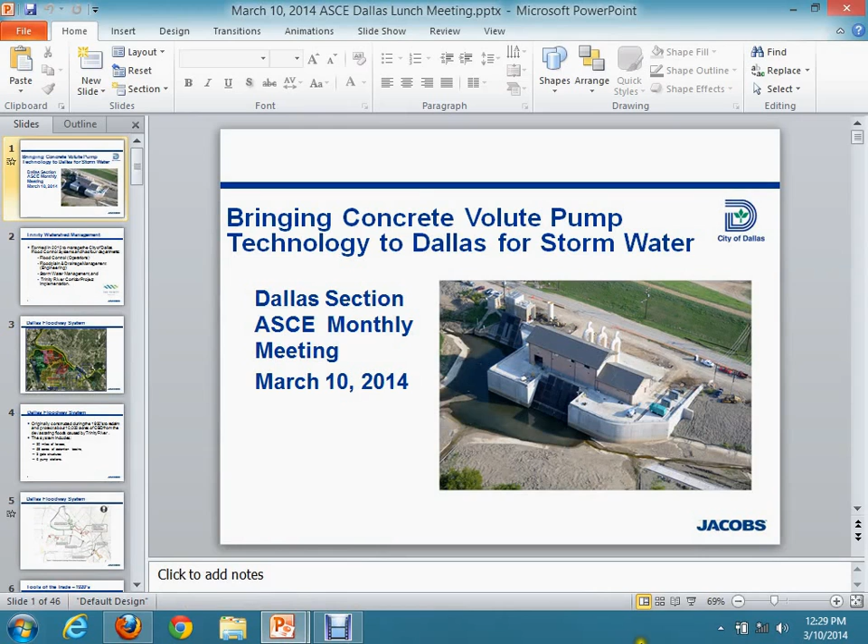One of the interesting things about ASCE is that they have a wide variety of programs. I've listened to people talk about policy and their experiences as an engineer - Philip's going to help me out there. You manage to work in the technical side every now and then. If you remember watching the Olympics a couple weeks ago, judged events had style points and technical points. Well, I'm not saying we won't get any style points today, but we're going to go heavily for the technical points. So I'm working with Leslie to see if you can get double PDH credits for that, if you can hang with me.

We're going to talk about the Dallas Stormwater Pump Station program that we've been working on for the last several years. We've been doing this under the Trinity Watershed Management Group. It's a division of the City of Dallas. They're separate now, separate from Public Works and Water Utilities, and they really have four main missions.

One of those is flood control - they operate the levees and the pump stations we're going to talk about. They also do floodplain and drainage management for the storm sewer pipes and things like that. They have a stormwater component - if you live in the City of Dallas and pay that stormwater fee, these are the guys that manage that. They also manage the big Trinity River Corridor project that this all kind of centers around. So it's a very dedicated group with a wide mission.

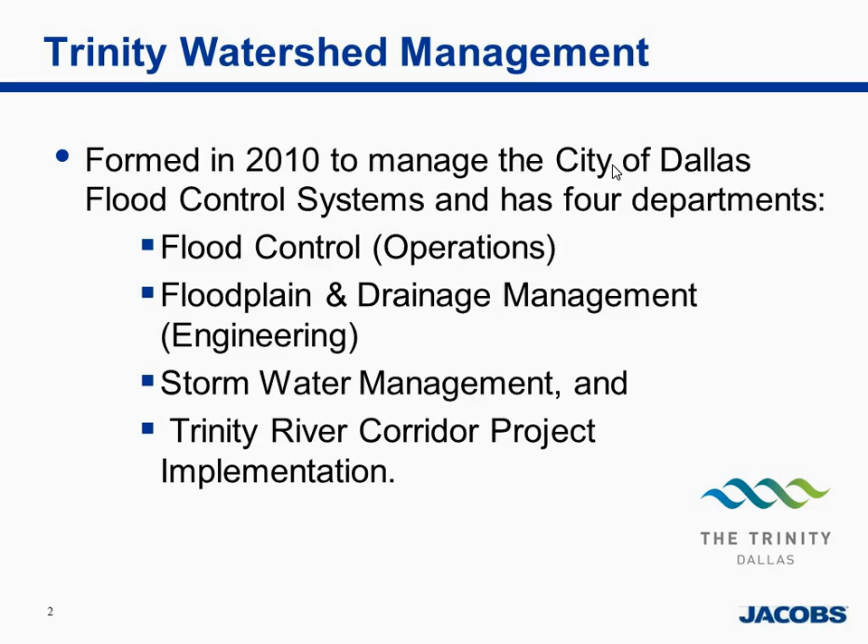One of the key features of this whole project and program is the Dallas floodway system itself. This is an incredible engineering feat - kind of the reason Dallas is here today. You probably couldn't build it today, but it's the reason we're here in a lot of ways. Back in the 20s, floods cut off downtown Dallas from Oak Cliff, and the city leaders decided they couldn't let that happen anymore, so they came up with a plan to build the Dallas floodway.

Basically what it does is divert the Trinity River from the Elm Fork and the West Fork down through these two parallel lines you see in the picture - those are levees that funnel the floodwaters through downtown and Oak Cliff. On the top side is downtown; we estimate it protects almost $8 billion in real estate from flooding. On the bottom side, the west levee side, is Oak Cliff, with thousands of homes protected in that area.

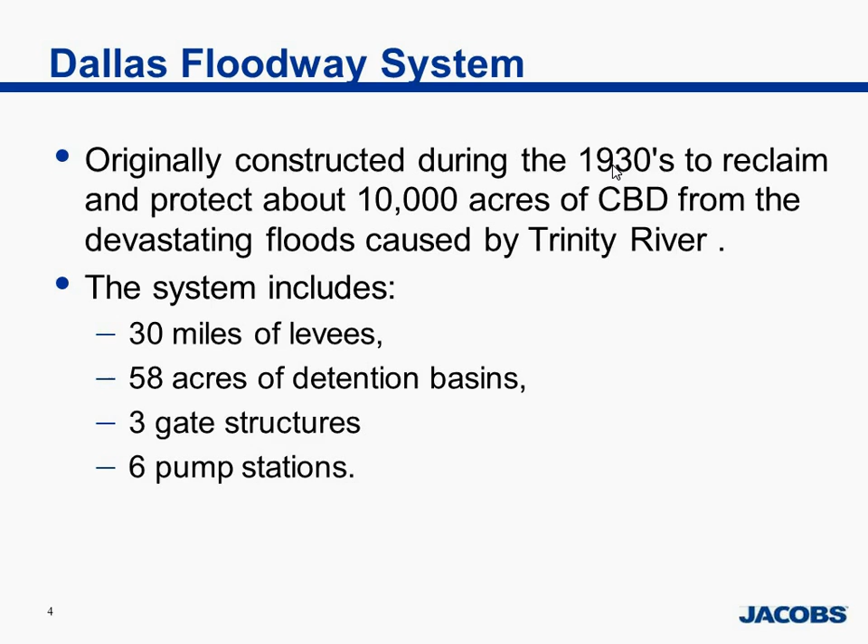The floodway system was devised in the 20s and built in the 30s - the levees were built then. The system includes 30 miles of levees, covering an area larger than Central Park in New York. It has detention basins that store the floodwaters, gate structures, and a series of 6 pump stations. Some stations are actually complexes with dual pump stations at each location, and all of that comes together to form the interior drainage, or floodway system.

This is a bit of a schematic of that. You have the white area in the middle - that's where the levees are that funnel the floodwaters through. So when water from a storm drains from downtown towards the levees, it needs to get pumped over the levees, very similar to what happens in New Orleans, Sacramento, and other cities around the country. So it's a very unique system for Dallas in this area.

Those red dots on the top side and bottom side are the 6 pump station locations. On the top side, downtown, we have Able, Baker, and Hampton. On the bottom side, the Oak Cliff side, Charlie, Pavaho, and Delta. That makes up the system that protects all of that area from flooding.

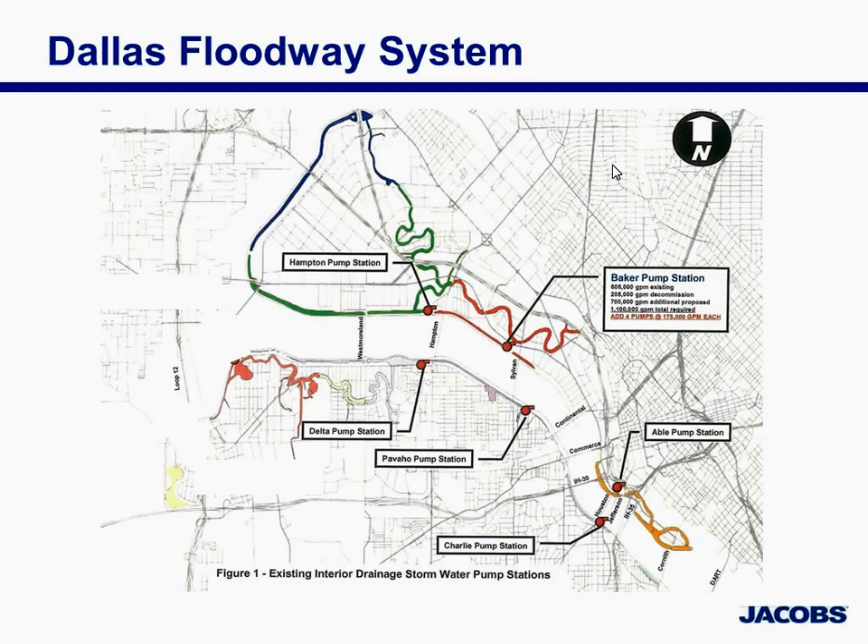I want to say a little bit about the interior drainage system. It's incredible that guys back in the 20s, using the tools they had, could come up with this.

They got it right. They couldn't have envisioned that all of North Texas would develop like it has, all the way up to almost the Oklahoma border, over to Fort Worth, and it still functions and carries a very large storm today.

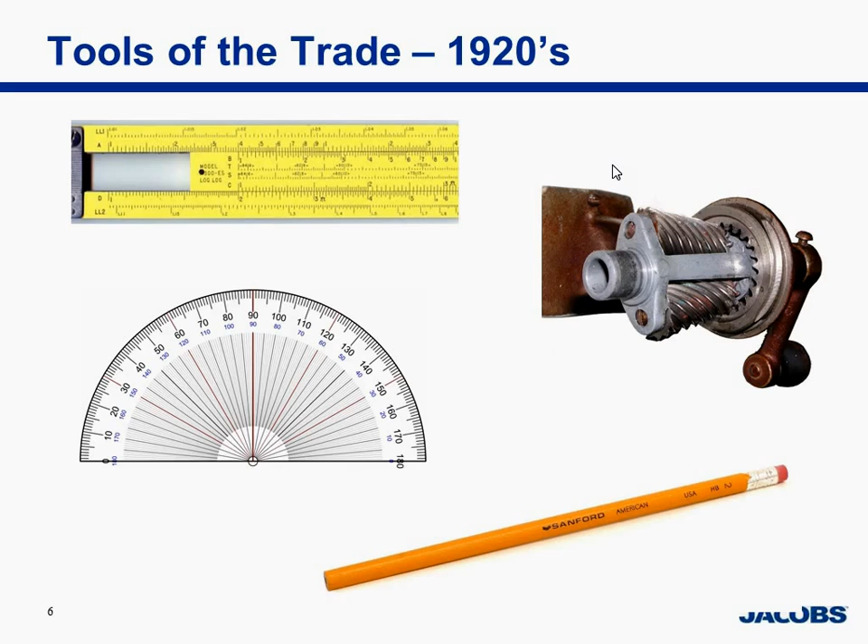Really the point we need to make is that this is a 100-year-old asset that was built back when we had this kind of stuff to work with. And what we're doing today with this program, what the city of Dallas is accomplishing, is really taking this asset into the next century and getting it ready for its next 100 years.

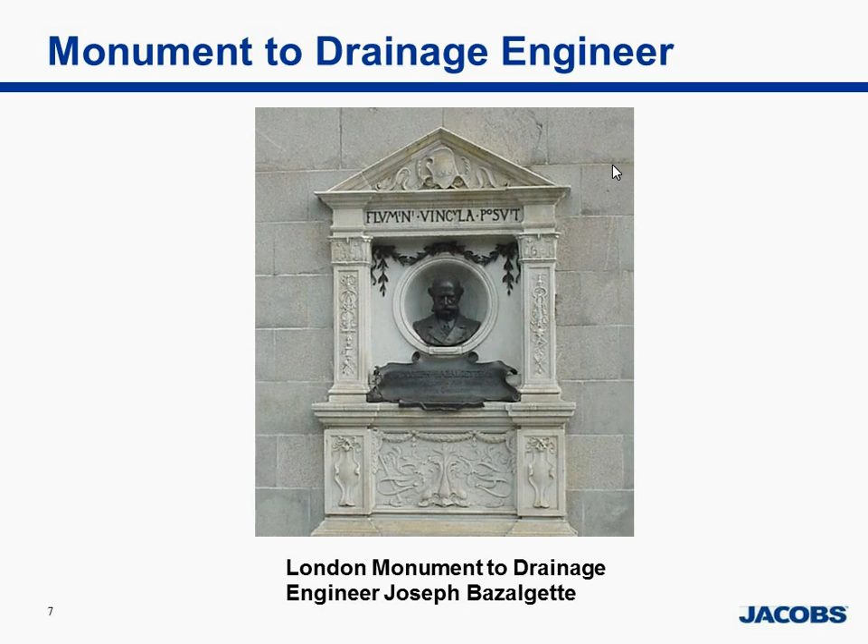So what got this started was the city—one of the councilmen several years ago realized that the pump stations and the levees and things might need to be upgraded. So they put together some money for a study to look at what needed to happen. We developed a program, did a study, did all the hydrology and hydraulics, the flooding impacts, and came up with a plan to minimize the flooding and upgrade the system.

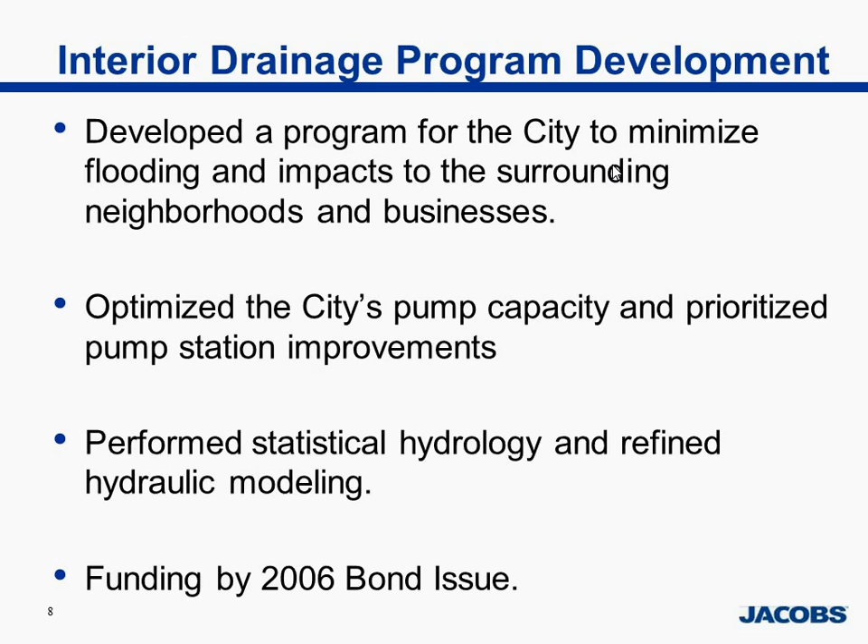What we tried to do is optimize the pumping capacity for what was there now and what needed to be built. We did all our hydrology and hydraulics and came up with a program, and then the city was able to get money from the 2006 bond issue, one of the largest bond issues the city has done, primarily related to drainage, to start on some of this.

Our study came up with a lot of recommendations. Primarily, we realized you've got a combination of storage and pumping to work with. The areas are so developed that you really can't get any more storage, so you need to build more pumping. So at all of those locations I mentioned earlier, something needed to be done—these are the recommendations for the new pump stations we came up with.

Currently, Pavaho Station is built. Baker Station is under construction. And soon, Able Pump Station, being designed by HDR, will be going under construction. So the total program cost was about $150 million. The city's not doing that all at once, but at least 3 stations are online right now to get constructed.

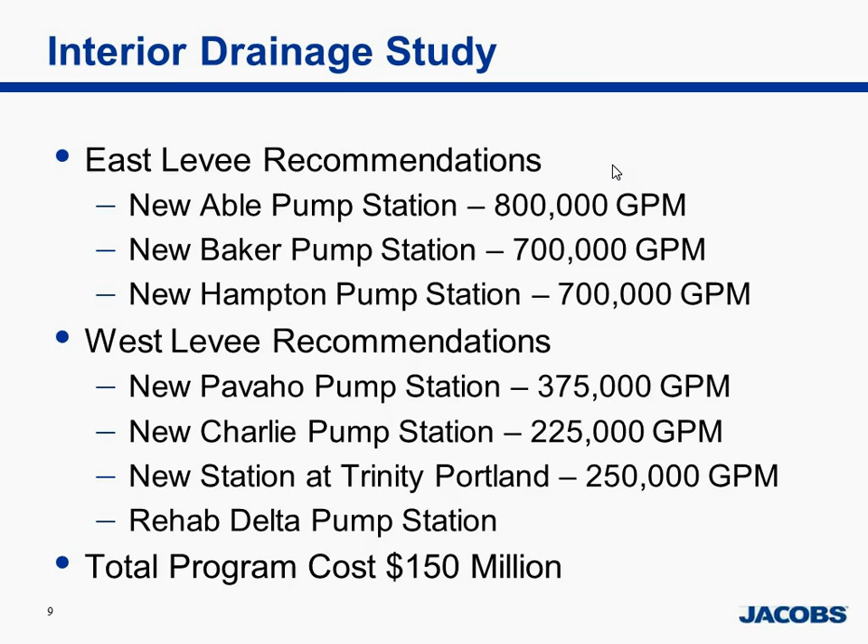So once we got through with the study and the recommendations, we started working on the design for the 2 stations. Since this was envisioned to kind of set out the program for how it would be done later, we wanted to come up with design guidelines for the stations that would be built. This would really be the first upgrade of stations since the 1970s.

One of the things we did was come across this entity called a concrete volute pump, which I'll talk about later, that really sets us apart from other stations. Some of the things that brought this into the 21st century are the computational fluid dynamic modeling we were able to do at each station, building physical models to make sure that when we put this all together and punch the button, it would work like we hoped it would.

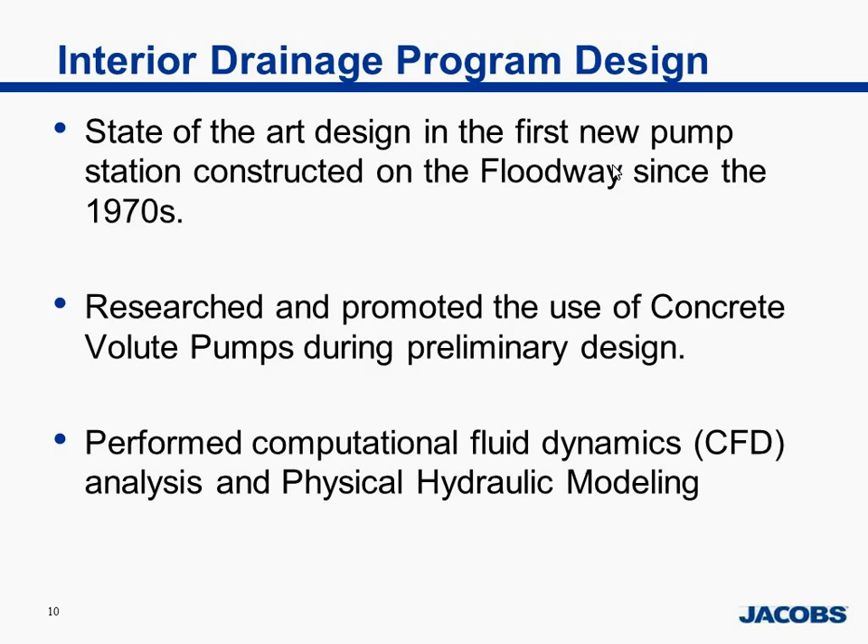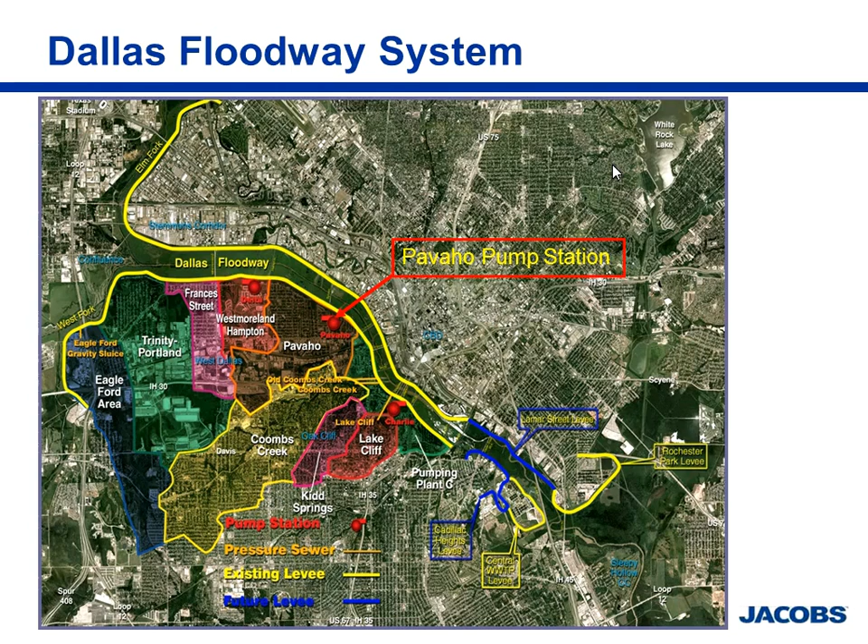So back to the Dallas floodway system, what I'm really going to concentrate on today is a case study of the Pavaho station that has been constructed. As I mentioned, there are others slated to be put online, and the Pavaho station is the one on the south side there, the west levee that protects a lot of area in Oak Cliff from flooding.

It provides 100-year protection in the area that drains to it, and it impacts about 1,000 homes that were in the floodplain based on the study that we did.

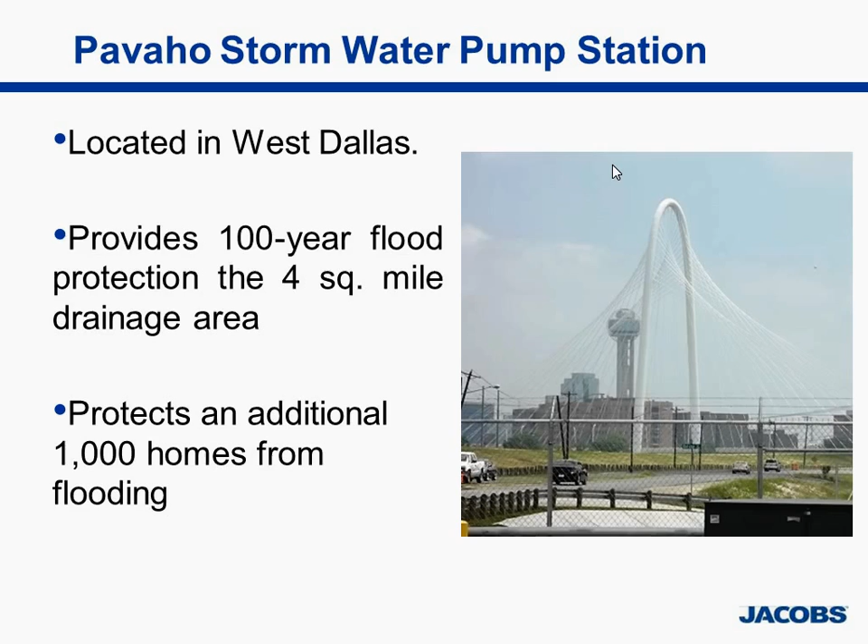This is the current Pavaho pump station. We call it the Little House. It is about 2,000 square feet in size, 82,000 gallon per minute pumping capacity, built in the 50s, and we found out it was undersized, but it was doing its job for what it was.

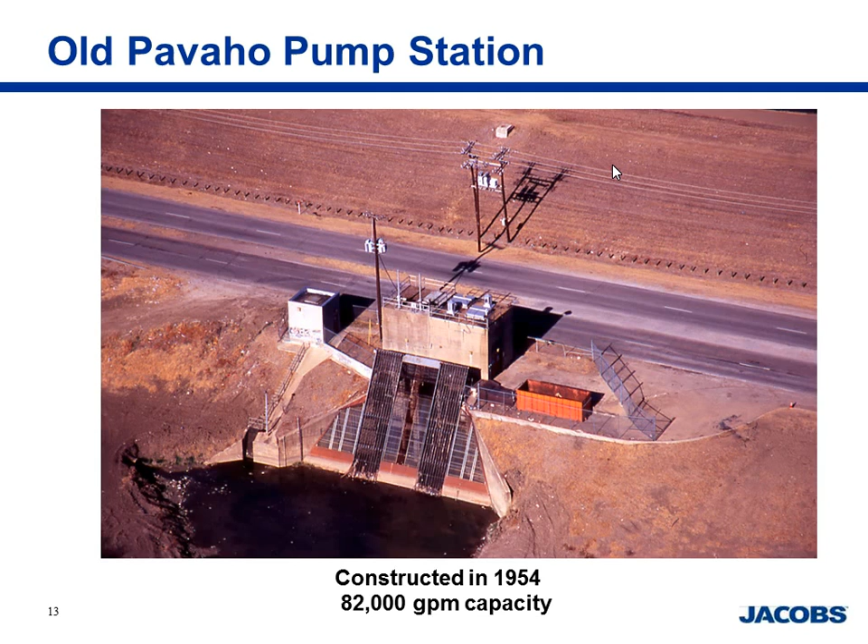During the study, we looked at what areas were flooding in the Pavaho sump area, the area drained by the Pavaho pump station. This is a plot of that floodplain. There's over 1,000 homes that were impacted, and those yellow and red dots show which ones are impacted.

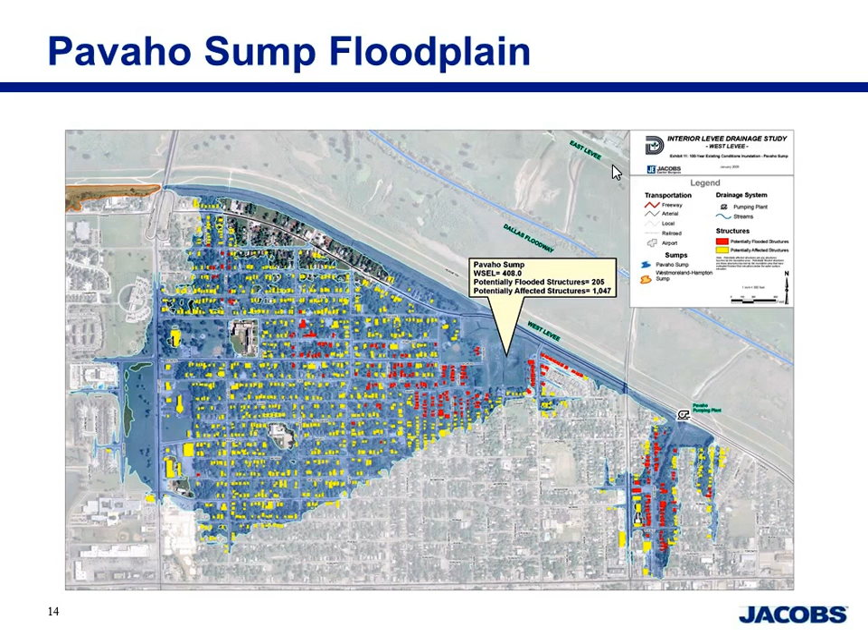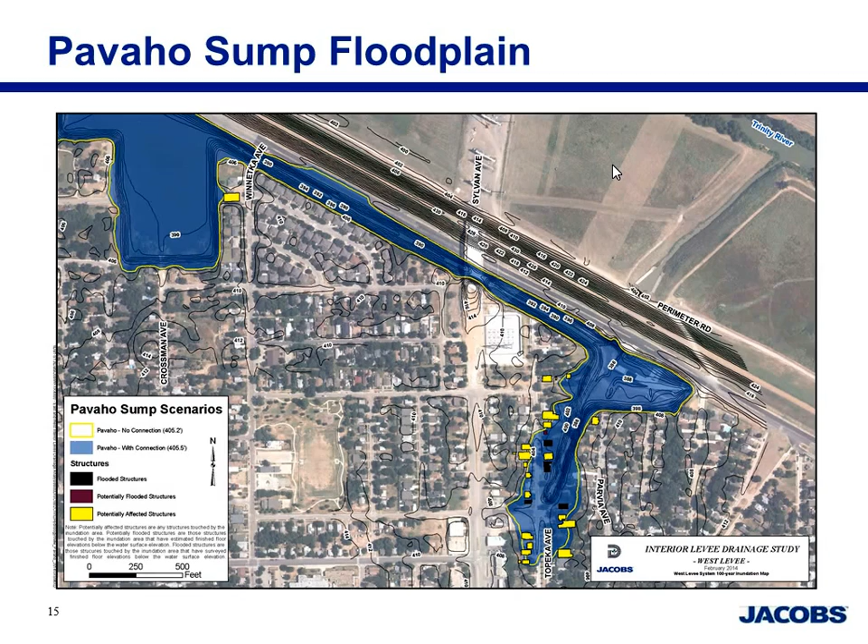So we ran our models and came up that if we had a certain size pump station, we could lower the flood elevation 2.5 feet, and we were only left with about 16 or 17 remaining homes in the floodplain. Those that are still there were just so low that we determined it was economically infeasible to remove them for the incremental costs you would get in pumping. So the city's dealing with that.

The station that we came up with ended up costing about $27 million. As I alluded to earlier, this is the first time that these concrete volute pumps were going to be used in the U.S. for pumping stormwater. Right now, they're used throughout the world in Europe, Asia, and India, for pumping stormwater and also power plant cooling. So they're a good application for this.

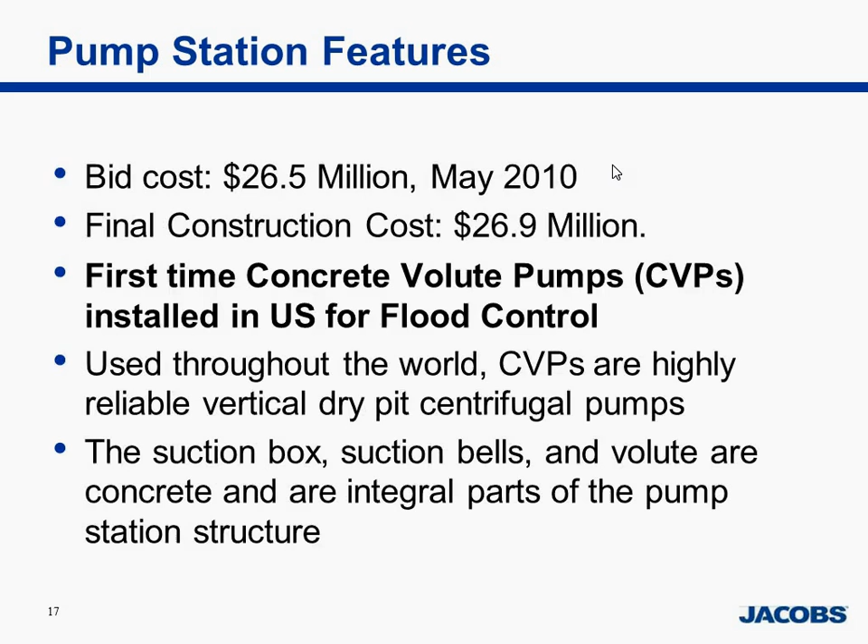What makes them really function well is that it's an integrated pump that is integrated into the station itself and the structure of the station. So we decided that Pavaho Station needed about three 125,000 gallon per minute pumps to do its job. Those are with 2,250 horsepower motors, pretty large motors. And we found out that this concrete volute pump was going to work based on its technical merits.

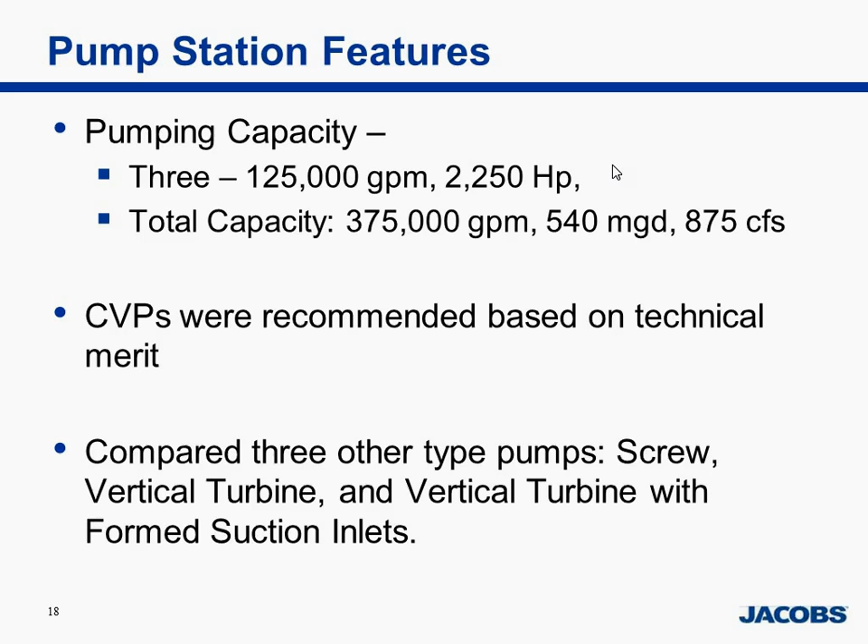We also looked at other types of pumps to come up with this conclusion. Screw type pumps are pretty prevalent in New Orleans, we looked at those. Also, the current Dallas system is just all vertical turbine pumps, and I'll show you kind of how that works in a second. We looked at those, and there's other types of vertical turbine pumps we looked at, but we settled on the concrete volute pump for these reasons. It just made a lot of sense.

When we're pumping over a levee, it's not like pumping into a long pipeline. You've got a low head, and you need a lot of water to get moved. So that's what these pumps do. The dynamic head is only about, at the max, 60 feet. It turns out that these pumps turn really slowly, probably a third as fast as some of the vertical turbines, so they're low maintenance, low vibration, and have a high efficiency, so the city gets more out of their electrical dollar.

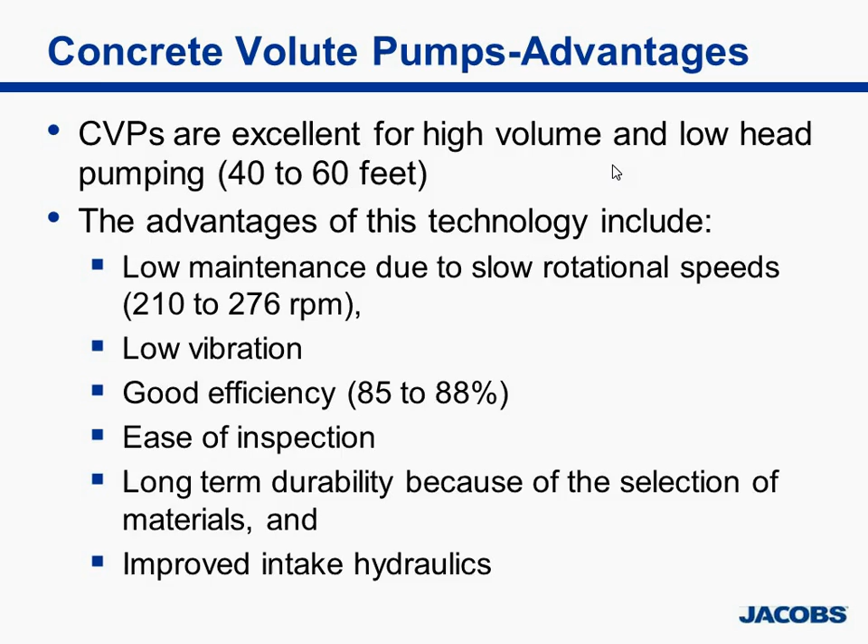Since the volute, or the bowl that the impeller turns around in, is a relatively high abrasion-resistant concrete, these things last a long time. They're very durable. One of the most important features that helped us settle on this is that the concrete volute pump, and here's a cutaway of it, is basically all part of the station. So you don't have a separate pump bell, you don't have separate components. You've got the impeller that turns inside the volute, and that's part of the concrete of the station.

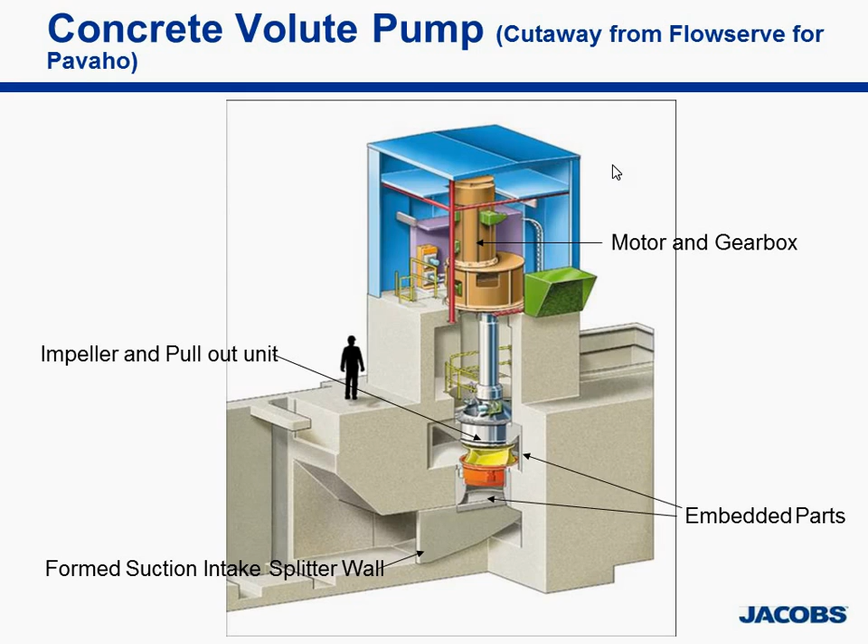This formed suction inlet down at the bottom allows you to get really great hydraulic characteristics into the pump. So the impeller doesn't have to be submerged as much, and you don't have to have all that expensive concrete below it to get that submergence on the impellers, that net positive suction head. We estimated that saved the program about $10 million from being able to shallow up the station and really take advantage of these hydraulics.

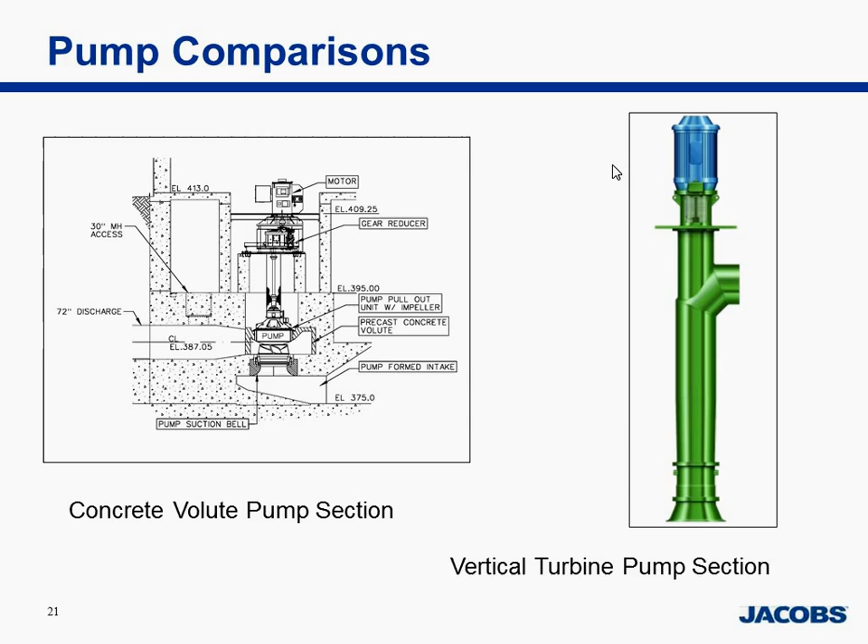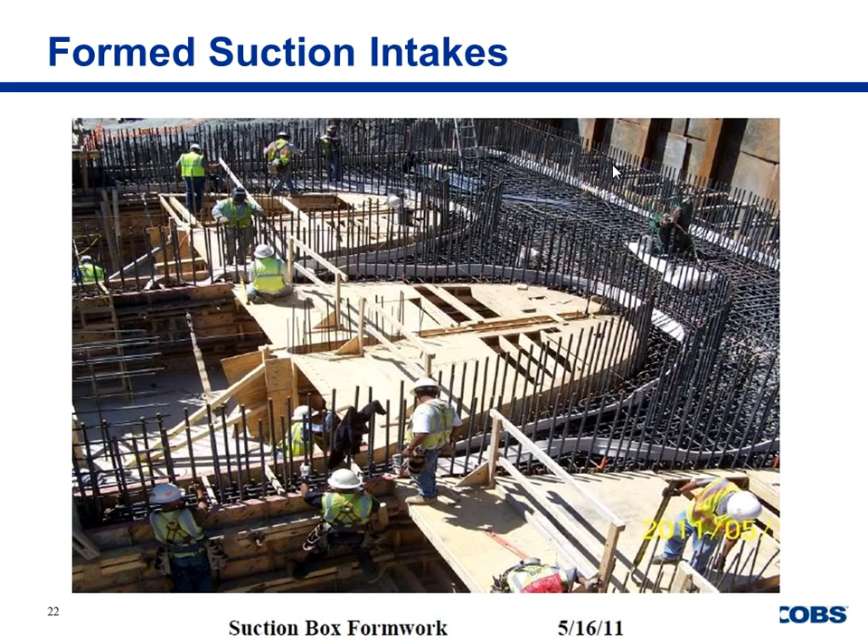This is a shot of the station under construction. Those are the suction bells being poured and formed. Kudos to our structural engineers for all the rebar that had to be put in there.

It's not going anywhere. But one of the interesting things about how you cast these pumps into the station: some manufacturers will build forms that they send out to the site, put the forms in place, put the rebar in around the corners, get it set up, and do a mass pour. That's a little bit tricky because of the rebar angles and setup involved. But the company that won the bid for Pavaho and Baker, Flowserve, based in Irving, came up with an idea to use precast components instead. They precast the shapes and the volute and all that tricky stuff, ship it to the site, and you put it together like a big Lego set, maybe more like Duplo, the big ones. You put that together, lock it down, line it up, and that forms the innards of the pump. Then you just do a mass pour around that, and it's really pretty slick.

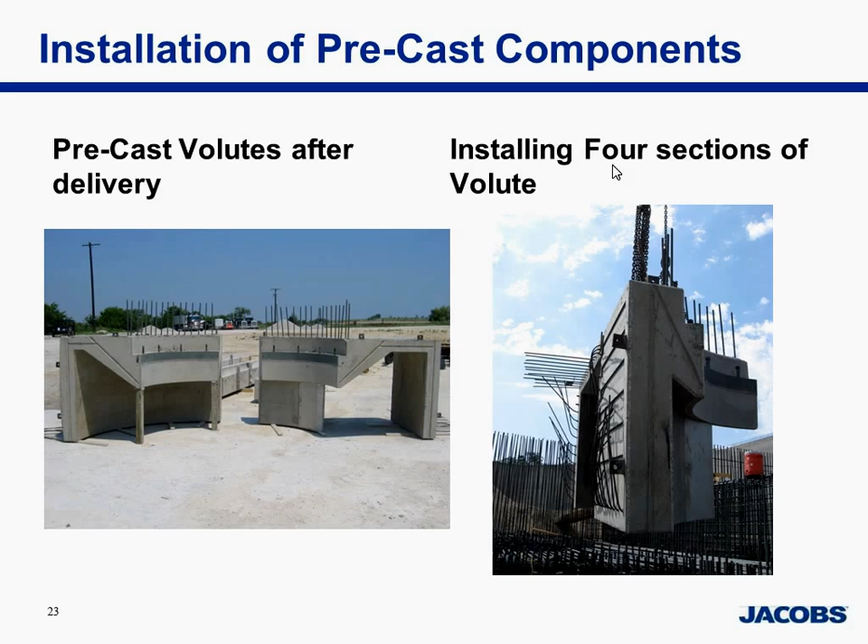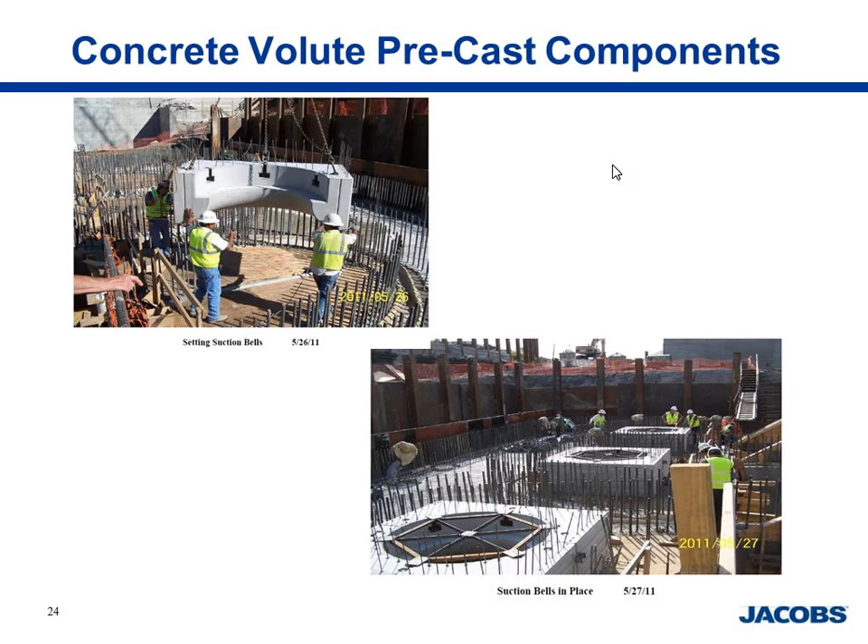A lot less intense on setup. So there's another shot of the volute precast components, and on the right is the suction bells coming up after the volutes have been poured. That's just all part of the station - that's the suction bell part after it was poured. You can get an idea of the size of that for this station.

That splitter wall piece of concrete in the middle is another integral part of how the hydraulics work out on all this and make it really pretty slick.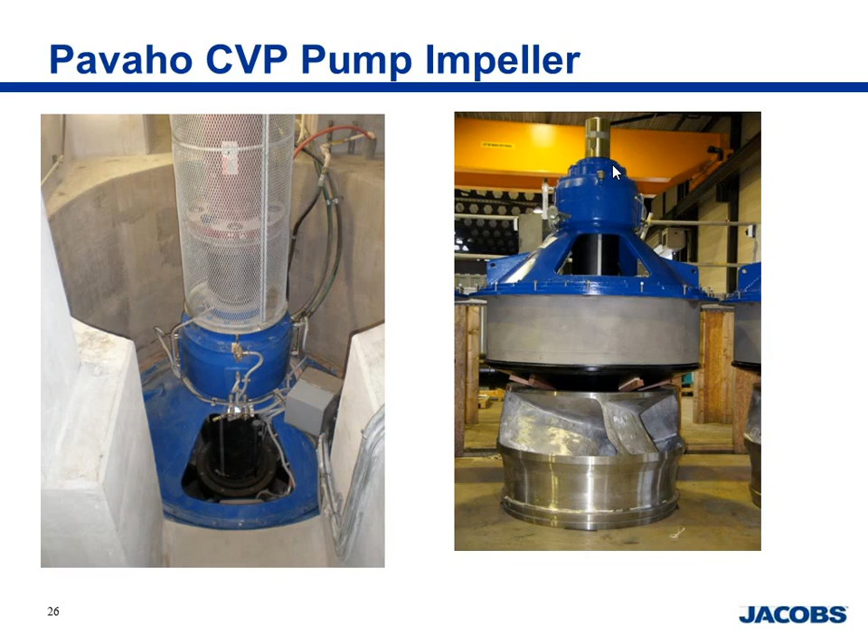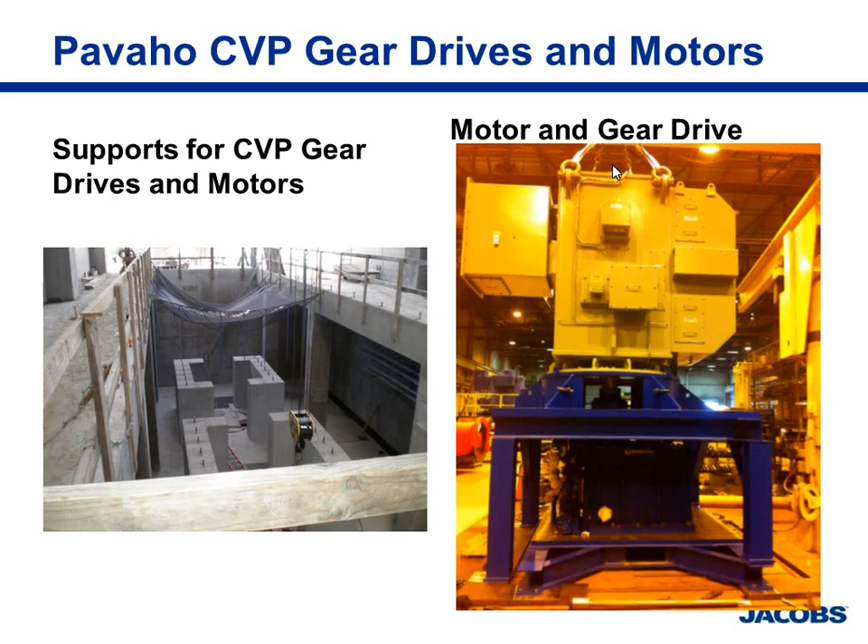Of course, on a station like this, you've got your basic motors and gear drives and things to make the pump turn. In this case, all of this is electric. There's dual feeds to the station, no diesel backup or anything like that. The city's got a good track record of their electric system working, so we went with that. Also, because the pumps turn so slowly and the motors on the market turn a lot faster, we had to have gear reducers to bring that speed down to the right turning speed for the pump.

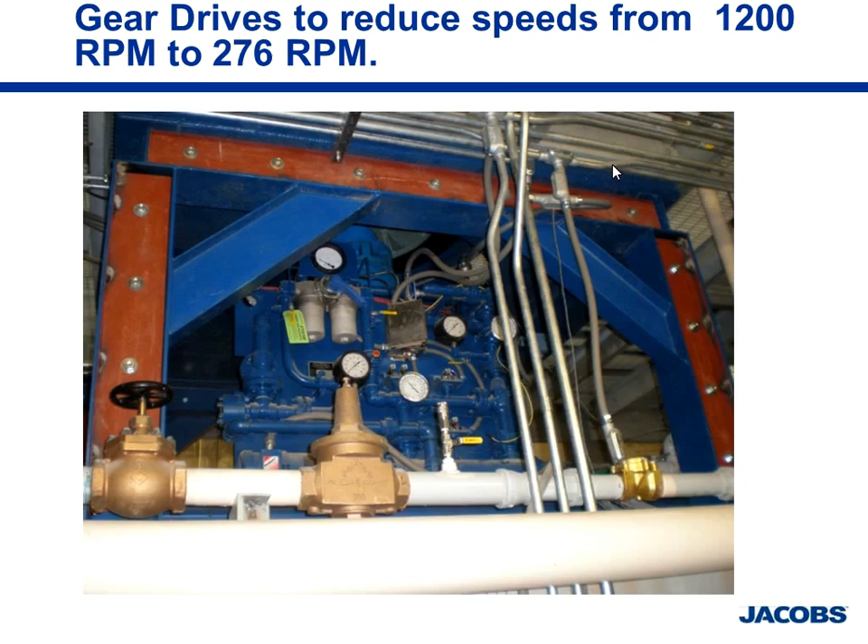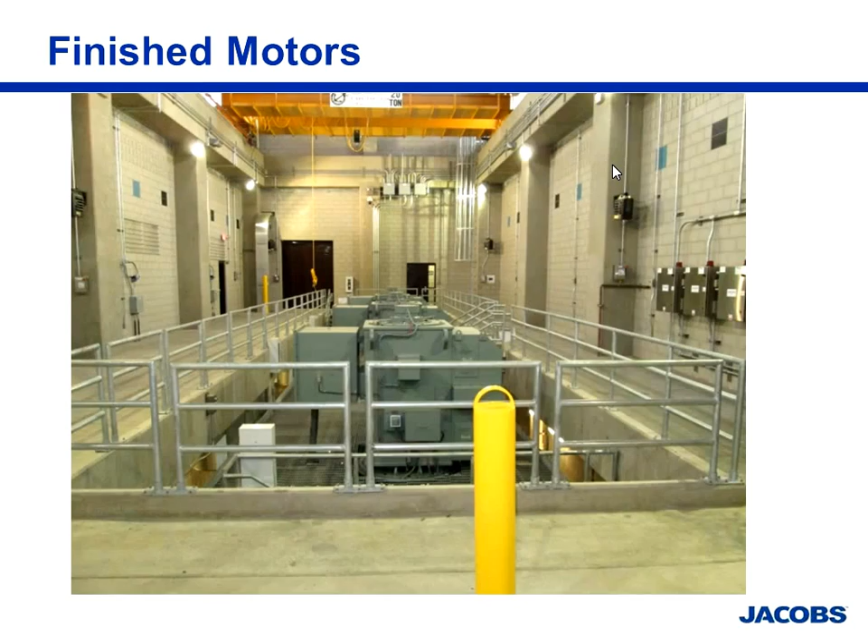This is a shot of the finished pump floor area. It's about 10,000 square feet, almost 5 times bigger than the old Pavaho station, and this is the finished part of it. The pumps are down below this floor.

One of the things you'll notice if you drive by the station are these weird-looking industrial Art Deco tubes, and they're actually functional - there's a purpose for them. When we started working on this, it was around 2007-2008, and there was a big bullseye on levees and levee systems because of what happened in New Orleans during Hurricane Katrina. The Corps of Engineers really didn't want us to touch the levees to get these new pump stations to discharge over into the river, so we had a bit of an issue there. I think we could have accomplished it at the time, but we were lucky that since the old Pavaho station was there, we just used the discharge pipes that already penetrated the levee as our discharge for the pump station.

What we needed to do, since you couldn't go up and over the levee at the time, was hydraulically separate the river from the pump station in the area that it protected. Those tubes are higher than the levees, and water cannot physically back up into the pump station. There's no valves, no mechanical elements. It's just a big dumb system that sits there and works, and nobody has to operate it unless they need to.

One of the things we realized early is that when you have something this big and you've got water crashing down over the inverted tube and down into a header, your basic Manning's and Q equals VA just doesn't work. There's a lot of air that gets entrained in these pipes as that water's crashing around, so we had to handle that in the design.

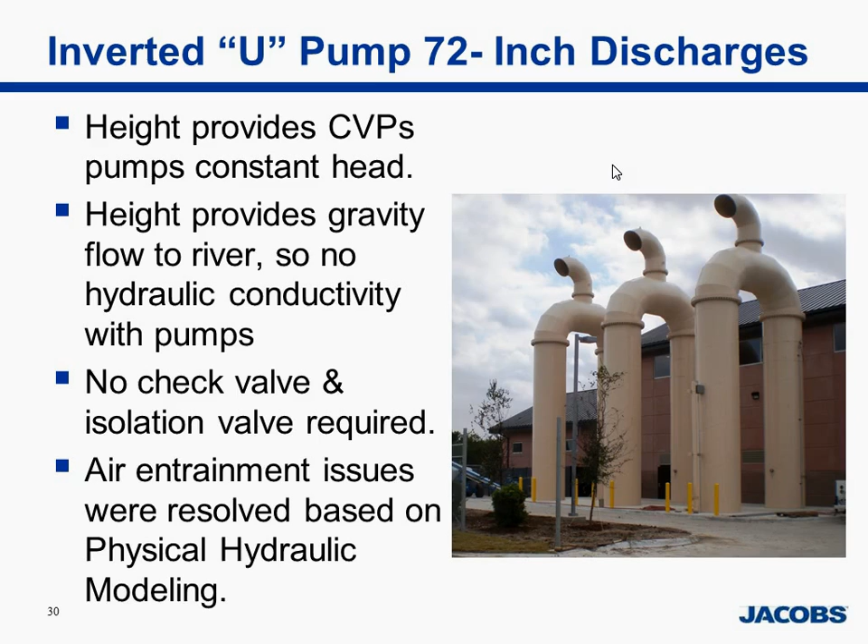So we came up with these air vents on the top to dissipate some of that, and then we ended up having to put a big air vent at the end, right before it goes out into the levee, to get rid of all that air and make the hydraulics work and make sure we got the flow we needed out of the station.

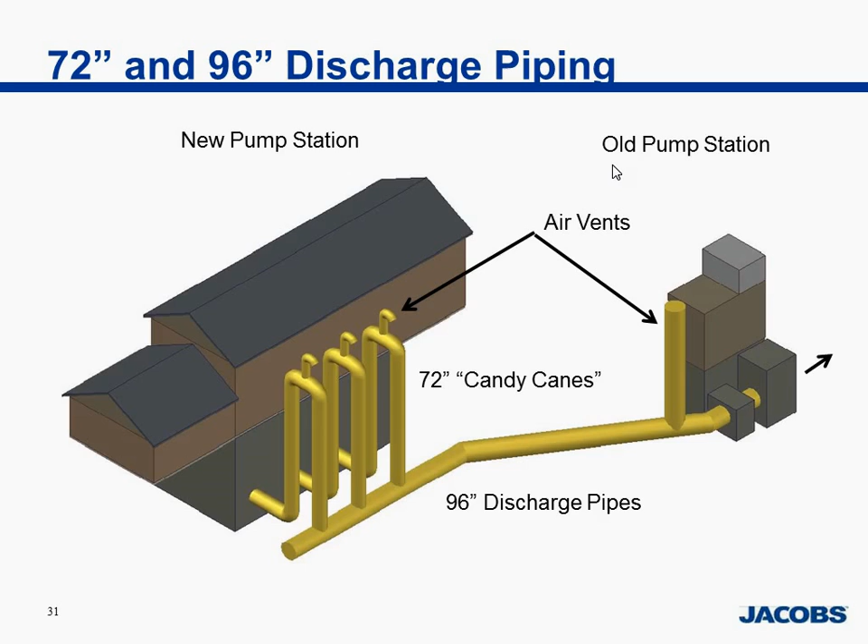So we did a lot of computational fluid dynamic models to do this, and we also built a 1:10 scale physical model of that whole setup in the lab, ran water through it, looked at the air that it was getting entrained, and figured out how to get rid of that to make it all work.

We came up with the air stack, the 96-inch air stack, and that turned out to be a blessing because the contractor was able to use that piece of pipe poking up to create a test loop inside the sump to test the pumps and make sure they were going to get the capacity we needed.

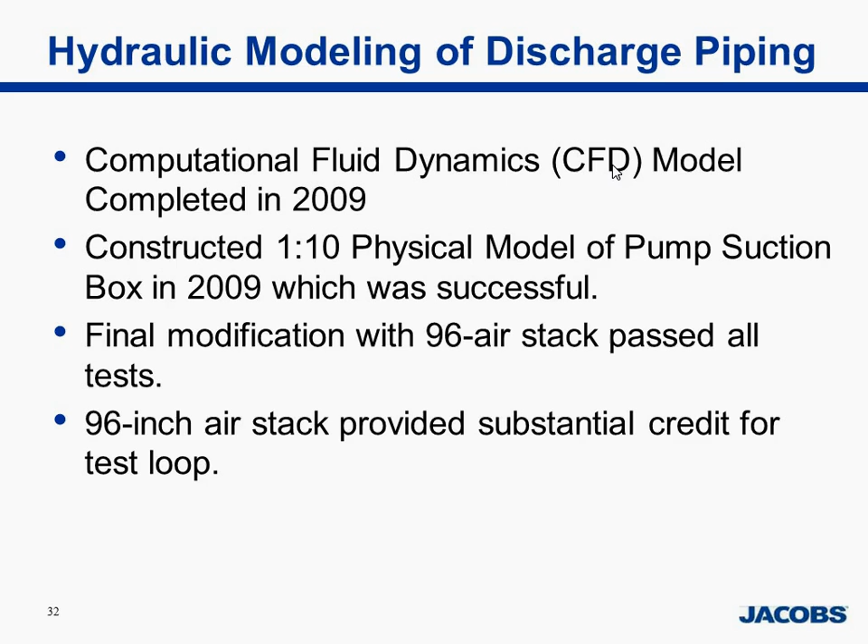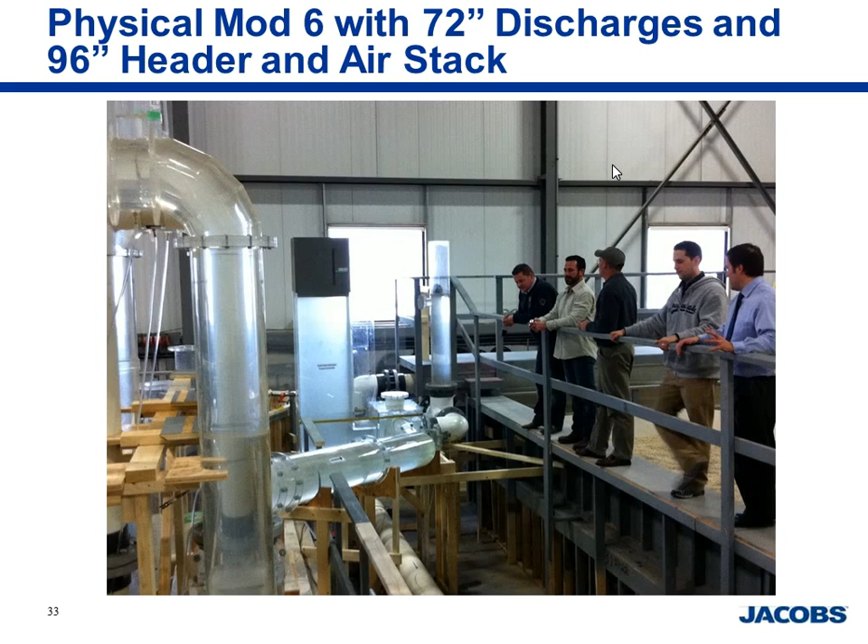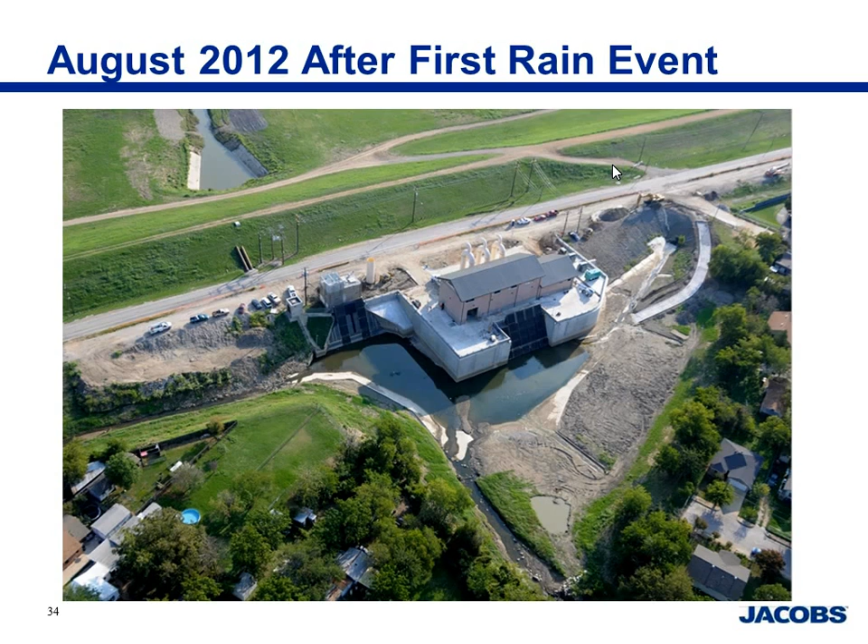The station was substantially complete in August 2012, and we had the opening ceremony in September 2012. Right after it was finished, we got about a 3-inch rain, and it worked. Everything was good, it pumped water, and everybody could sleep that night.